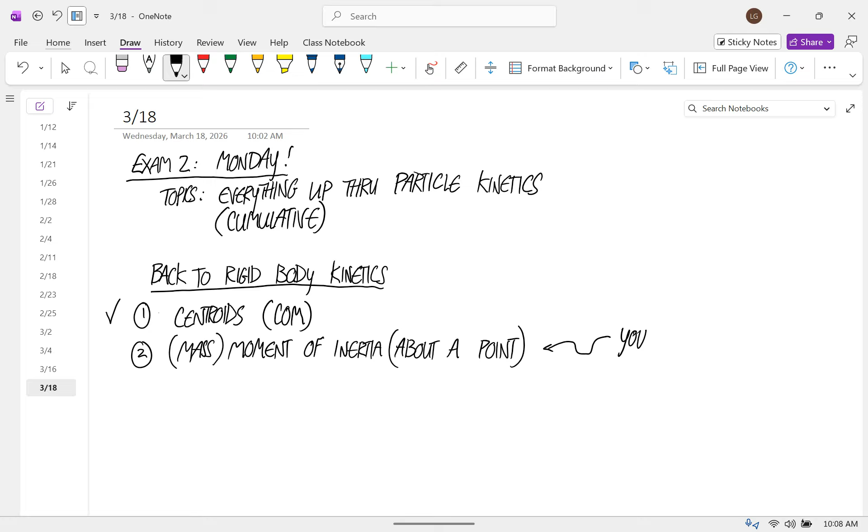And this is what we're talking about right now. You are here. And then after that, we have to talk about the moment of a force about a point. And again, if you're cool, you just call it a moment, but you have to remember that all this stuff matters.

Okay, so we're talking about the mass moment of inertia about a point. Last time I gave you the definitions, formulas I guess. Formulas for the moment of inertia. So now you know I'm trying to be cool. The moment of inertia about the center of mass for 4 simple shapes.

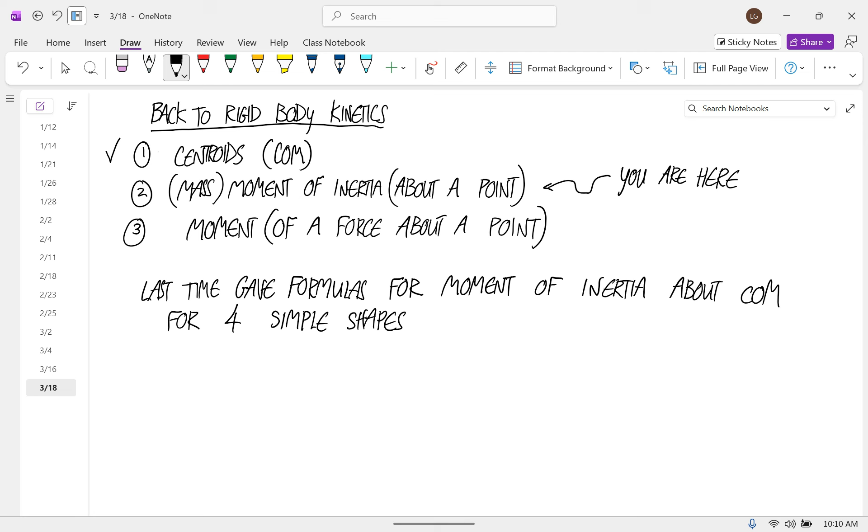Those were a slender rod, a thin rectangular plate, a thin disc, and a sphere. Okay? But those are about the center of mass.

So what if you want the moment of inertia about a point that's not the center of mass?

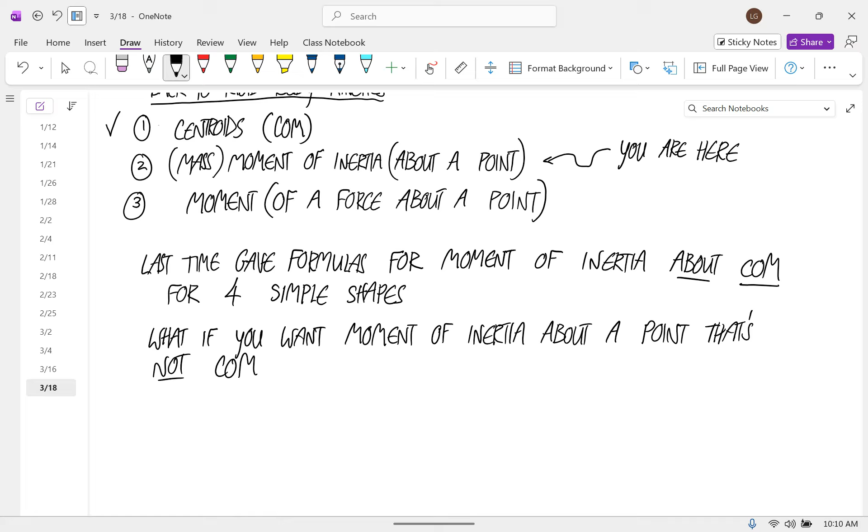And the answer is the parallel axis theorem. How many of you talked about parallel axis theorem in Physics 1? Okay. It's related to that. The parallel axis theorem is a thing.

Well, I'll talk about what it is. I think it's common that it doesn't come up, and you're just given formulas for the moment of inertia about the center of mass. You can give formulas for moments of inertia rotating around different points, and you can kind of gloss over that in Physics 1.

But here is the idea of the parallel axis theorem. If you have some arbitrary body, okay, and say that the center of mass is here, and say that you know the moment of inertia about an axis that goes through the center of mass. So I'm going to call this I sub C, the moment of inertia about an axis through the center of mass.

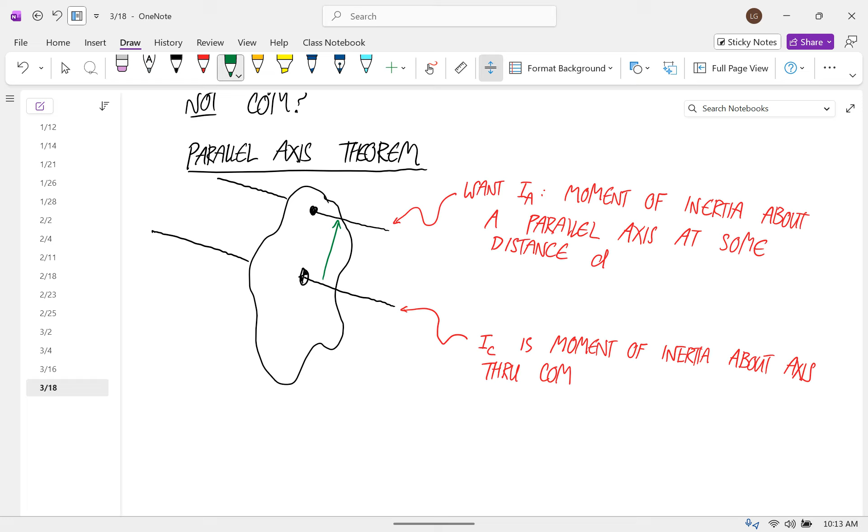And say that what you want is the moment of inertia about an axis that's parallel to that, but at some distance away. So say we want I sub A, which is the moment of inertia about a parallel axis at some distance d. Okay, so the distance between these two lines is d.

Then the moment of inertia sub A is equal to the moment of inertia for the one that goes through the center of mass, plus the mass of the body times the distance squared. The distance between those two axes squared. So that's the parallel axis theorem right there.

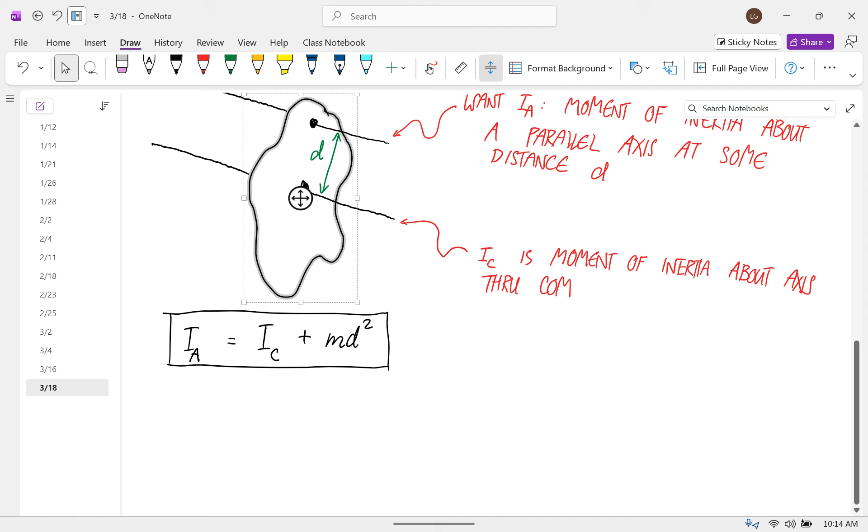And it means that even though all I gave you was the formulas for axes that go through the center of mass, we can easily calculate the moments of inertia for a parallel axis through any other point. What happens when we derivate that? What's the derivative of inertia? I'm just trying to think about the mathematical approach to why this works.

So yeah, why? This comes from an integral definition, and you could go through it. Don't write this down, but the moment of inertia about some point is the integral over the whole mass of r squared dm. So for each infinitesimal little piece of mass, you have to figure out the distance from the axis to that point and square it, then calculate that integral.

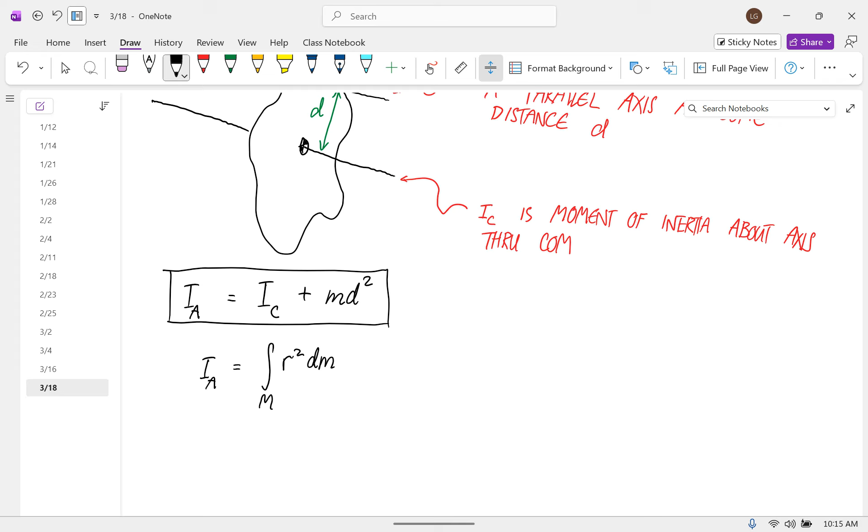And the way it works is, the definition of the center of mass is 1 over the total mass times the integral over the whole mass. I guess, instead of the centroid definition, I'll give the definition for the center of mass. So over the full mass, of x, y, dm. And this can't be area, this has to be total mass.

And then for each one of the little dm's in the definition of the moment of inertia, you can define that as a vector that goes from A to the center of mass to the point you care about. That's just vector addition. And then you can go through this whole derivation and pull out the part of the integral that is the moment of inertia about the center of mass, and you come up with this formula. It's messy, a little bit long, but you can come up with this really clean solution by just using those two integral definitions.

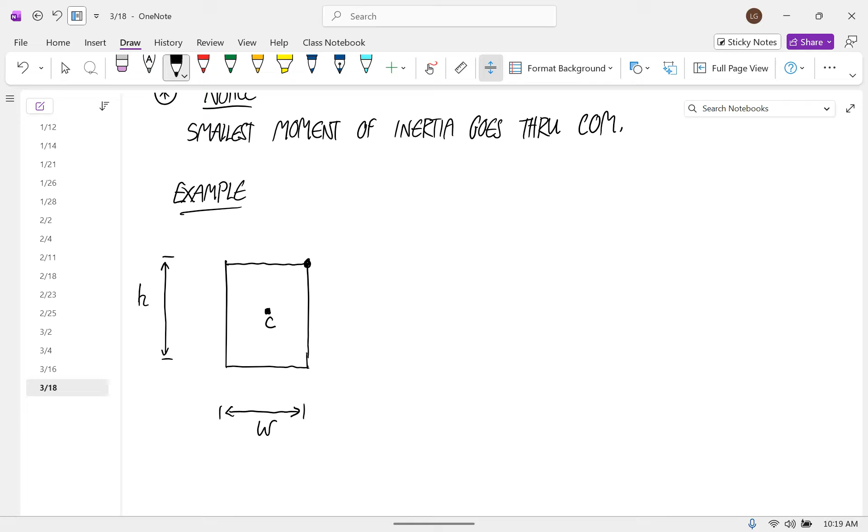And we're doing a planar problem. The center of mass is right where the two axes of symmetry, lines of symmetry, cross. So it's right here. And let's put a point A here. And we want to calculate the moment of inertia about A.

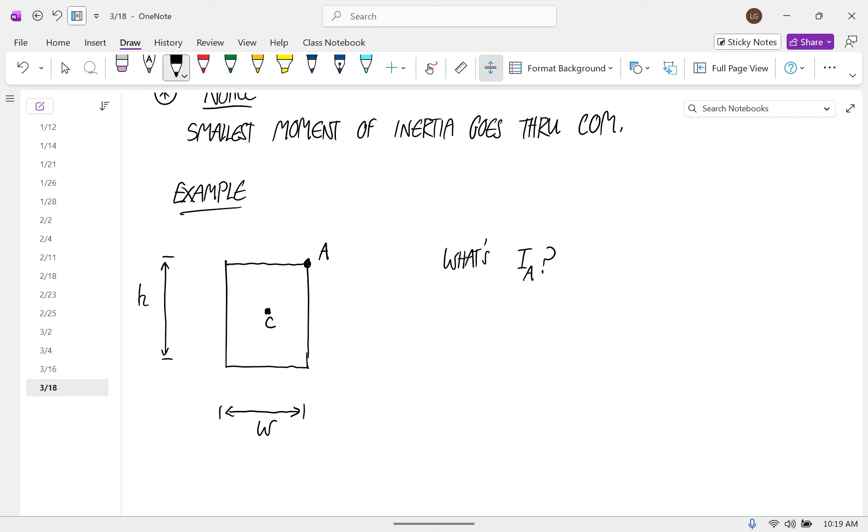Okay, so this is our rectangular plate. We're doing a 2D problem, so think about whether it's rotating like a blade or a paddle. Is this rotating about Z like a blade, or about X or Y like a paddle? I think it's going through like a blade - think of it as sheet metal spinning around in the plane.

The funny thing is, I said thin rectangular plate here before, but for this one it doesn't matter mathematically whether it's thin or not. For the other two axes, it does. So this could actually be like a rectangular cylinder going as far as you want into the page, and this formula is still exact.

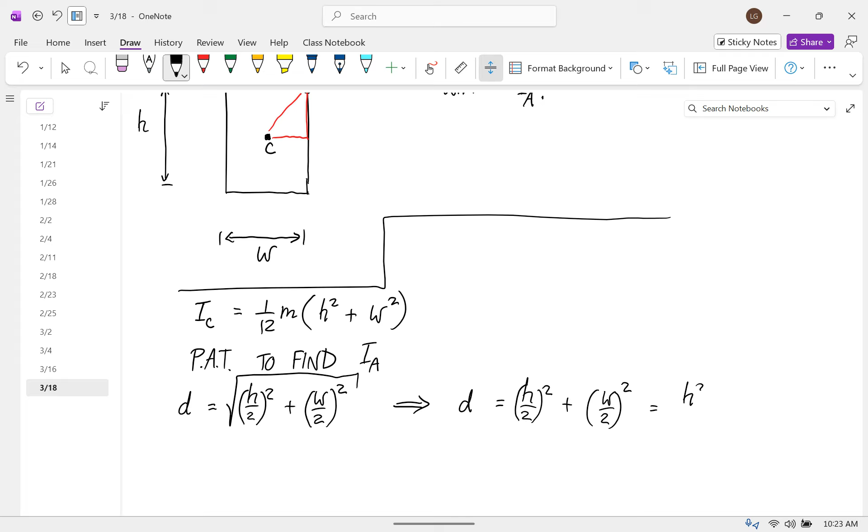So if you square that, d squared is equal to h over 2 squared plus w over 2 squared, and we can write that as h squared over 4 plus w squared over 4.

And so I sub A is equal to 1/12 times mass times the quantity h squared plus w squared, plus 1/4 times the mass times h squared plus w squared.

How did you get rid of the square root for d? Because I wrote this wrong - this is d squared.

Because what we want in the parallel axis theorem is mass times d squared. So now everything's the same except the coefficients. If you get a common denominator, this is 3/12, and 3/12 plus 1/12 is 4/12, so this is 1/3 times the mass times h squared plus w squared.

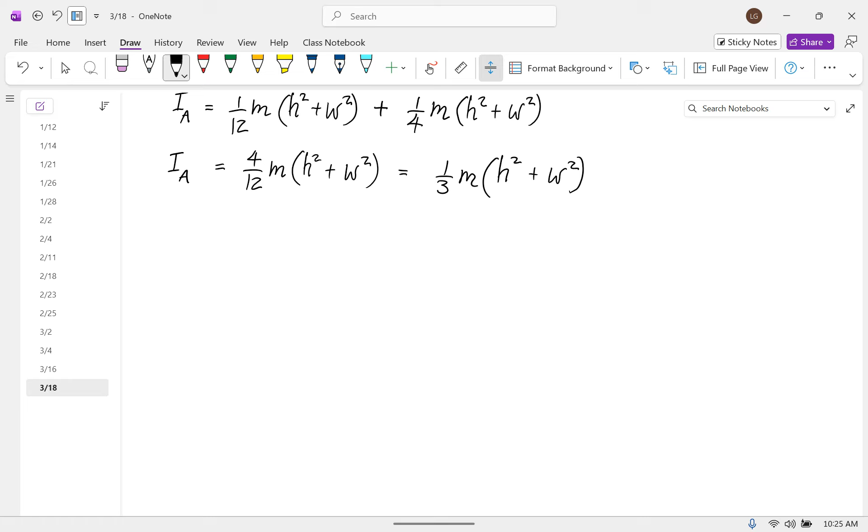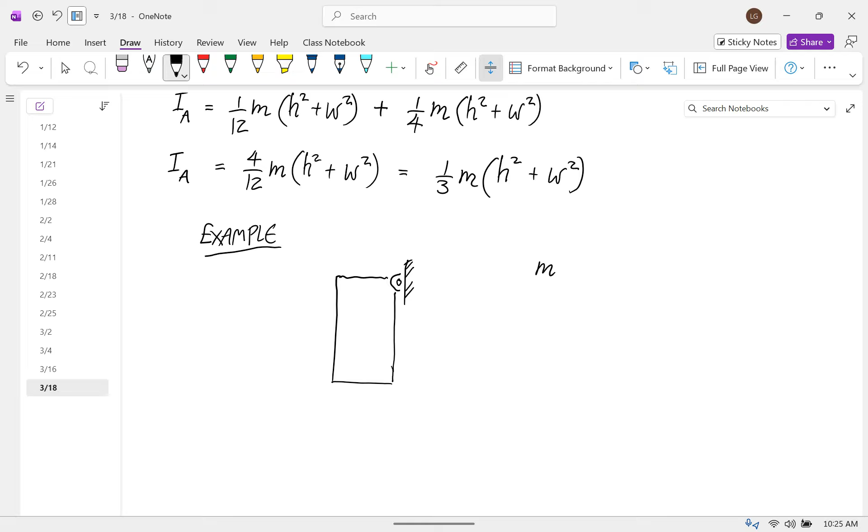Okay, so when would this come up? Let's say we have an object like this, and let's say the mass of this object is 10 kilograms, and this distance is 0.2 meters, and this distance is 0.6 meters.

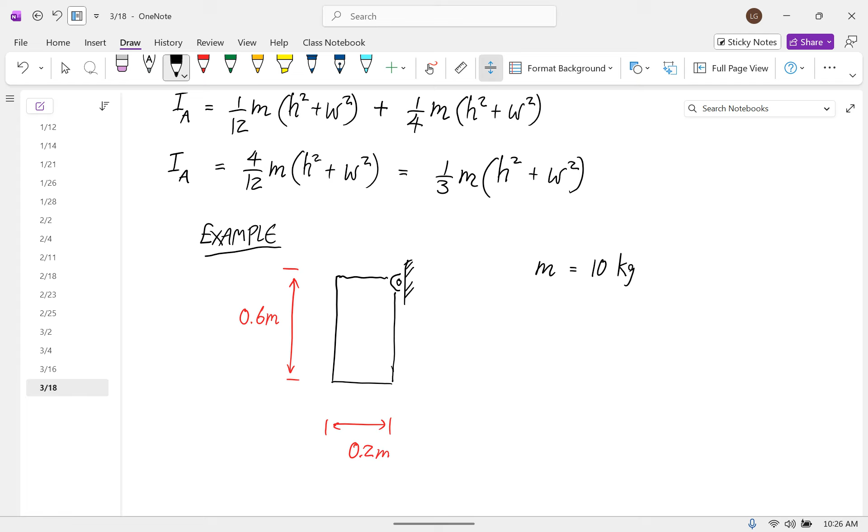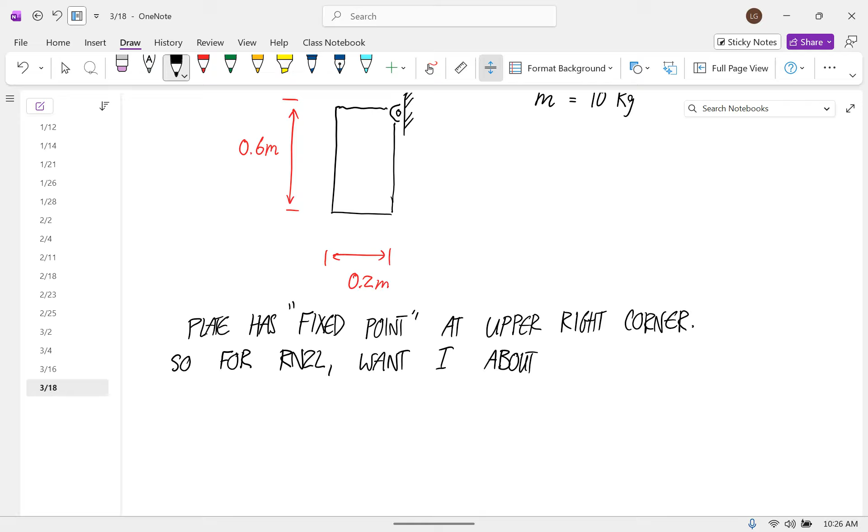This plate has a fixed point at the upper right corner. So to use rotational Newton's second law, we want the moment of inertia about the fixed point, about that upper right corner. I'll call this point A so we can refer to it.

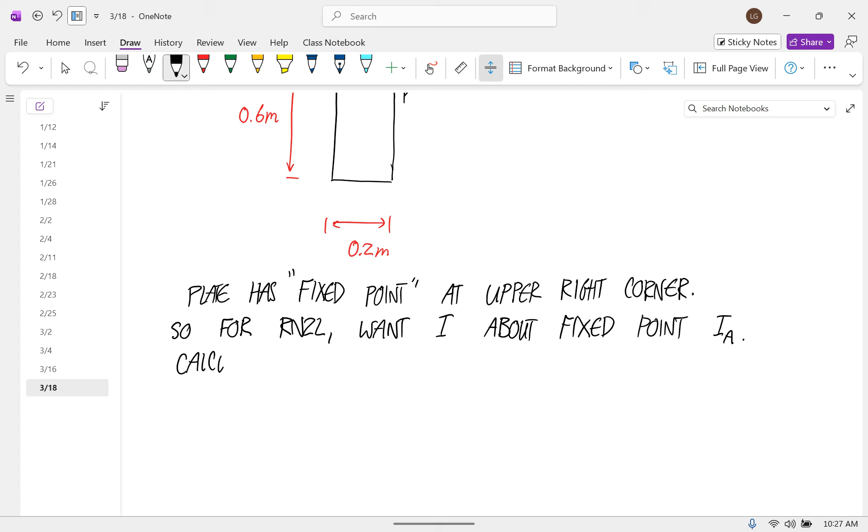Okay, so let's calculate it. I'm going to use the parallel axis theorem again, because in general you're just going to have to use that, even though I just came up with a formula that we could use for this.

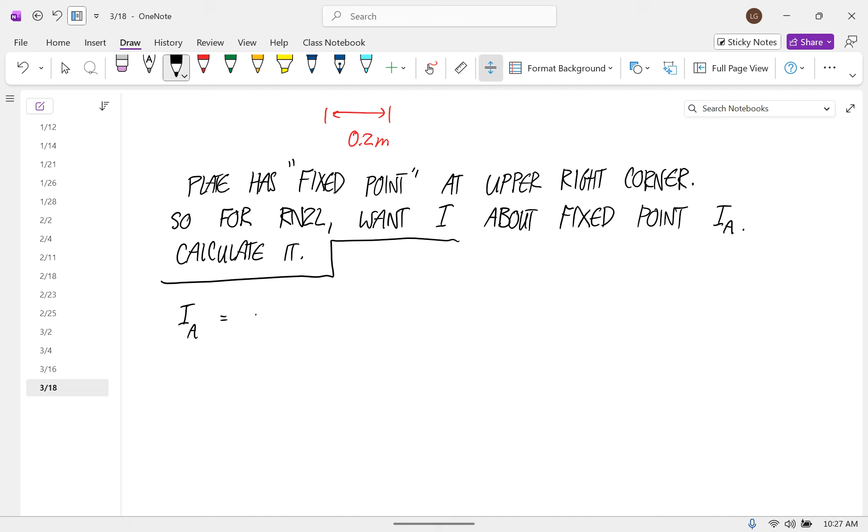So the moment of inertia about A is equal to 1/12 times the mass times the quantity 0.2 squared plus 0.6 squared, plus the parallel axis theorem part, that is the mass times the distance squared: 0.2 over 2 squared plus 0.6 over 2 squared.

I need a calculator.

So this is equal to 0.3 repeating plus 0.1 squared plus 0.3 squared. What's wrong with that? This is just 1.0. And so I sub A is equal to 1.3 repeating, and the units are kilogram meter squared.

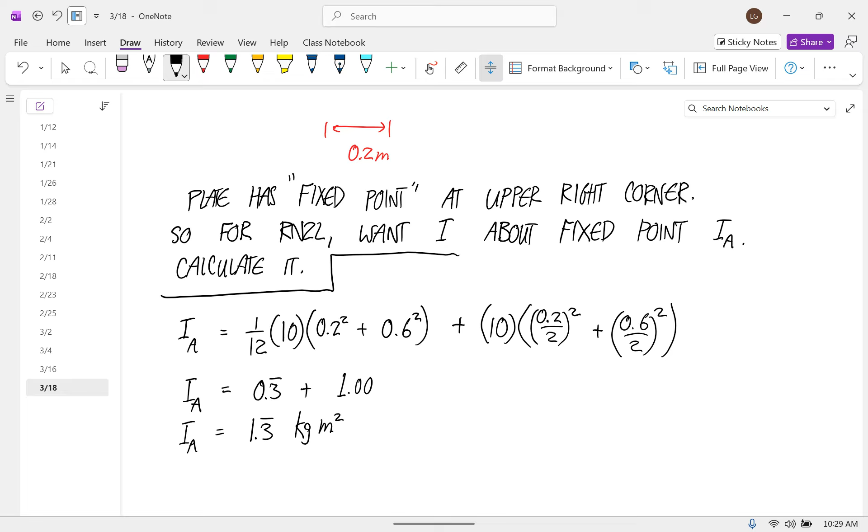Okay, any questions about that? And if your fixed point was somewhere else, then you just use that different distance from the center of mass to do this calculation.

So now, building a complicated shape out of simple shapes.

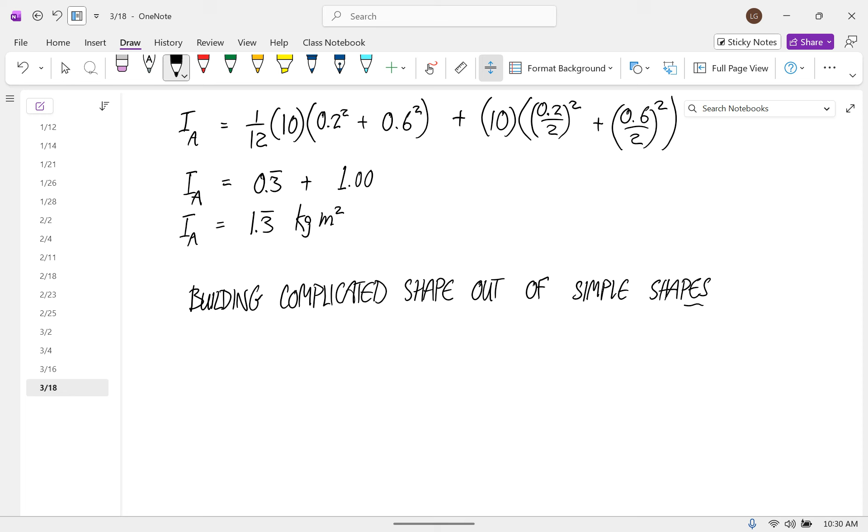Okay, so let's say that we have something like this. And we want to calculate the moment of inertia about some point A. How are we going to do this?

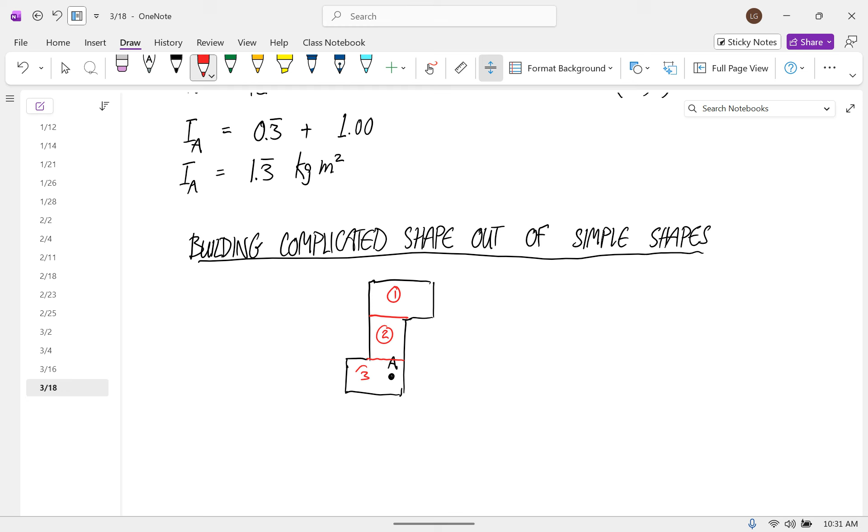Break it up into the simple shapes. So I'll have one rectangle here, and one here.

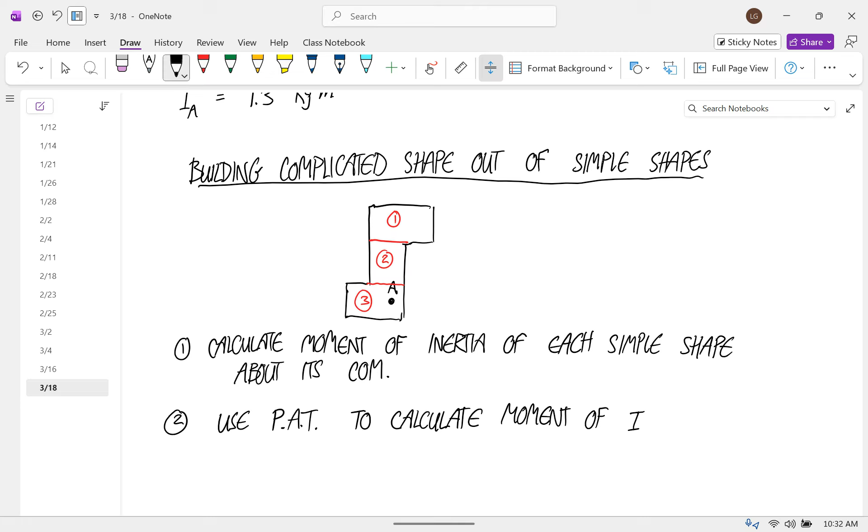So first, calculate the moment of inertia of each simple shape about its center of mass. Second, use the parallel axis theorem to calculate the moment of inertia of each simple shape about A, and then third, just add those up.

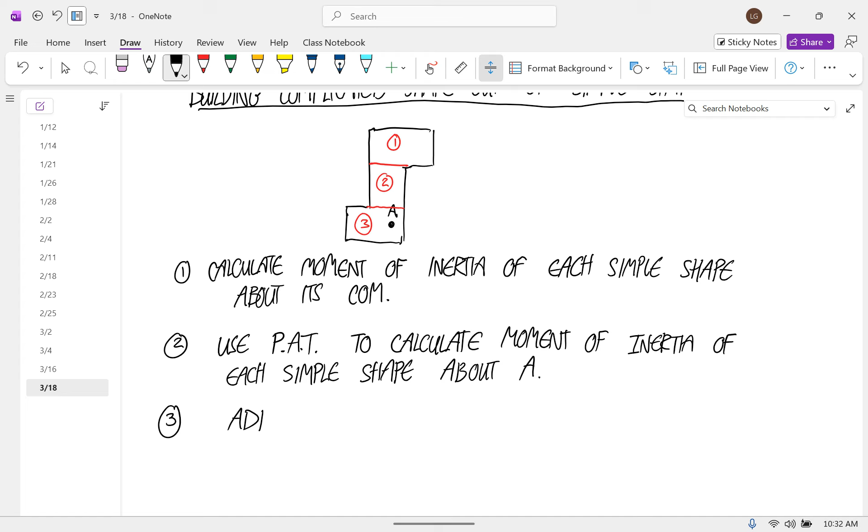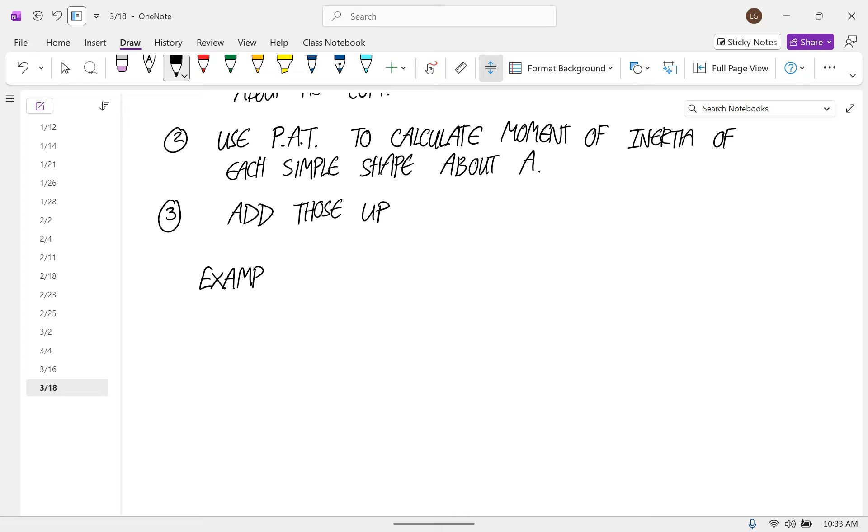Okay, so let me do an example of that. Let's say we have an L shape, and the thickness everywhere is 0.1 meters, and this is 0.1 meters. And this distance is 0.5 meters. And this distance is 1 meter.

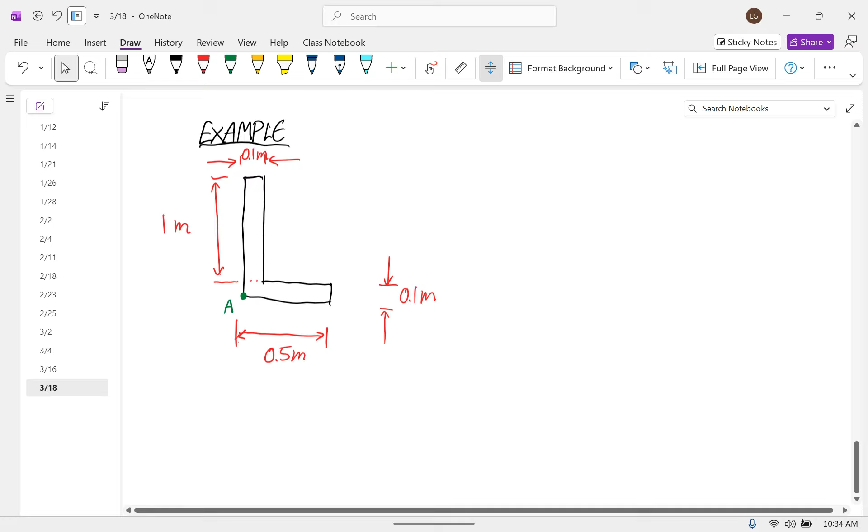And let's calculate the moment of inertia about this point. So step one, we're going to break this up into two rectangles. I'll call this one rectangle 1, this one rectangle 2.

Okay, so for rectangle 1, the moment of inertia about the center of mass is equal to 1/12... Oh, I didn't give this a mass yet. Yeah, it has to be a homogeneous density. It does, and we're going to just always assume that. So the mass is equal to 5 kilograms.

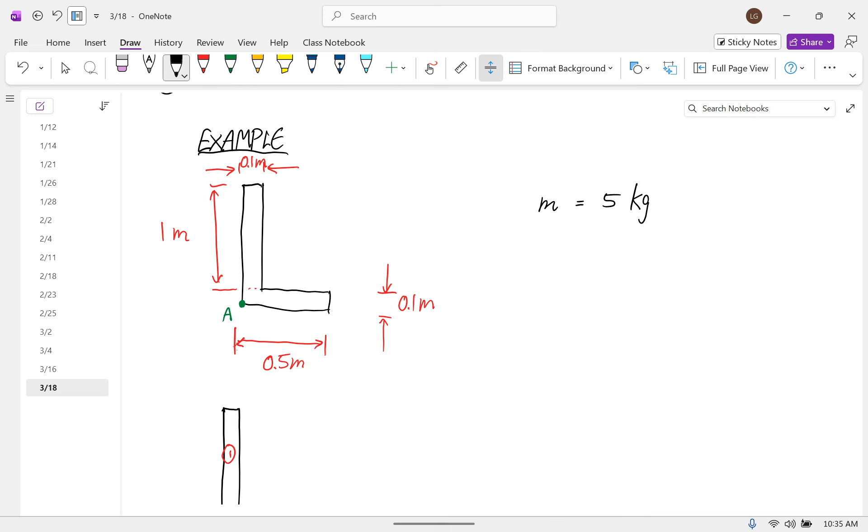Because it's homogeneous, we can just break up the mass for the two bodies by the ratio of the areas. So this is equal to the mass of object 1, which we'll have to calculate, times the height squared, so 1 squared plus 0.1 squared.

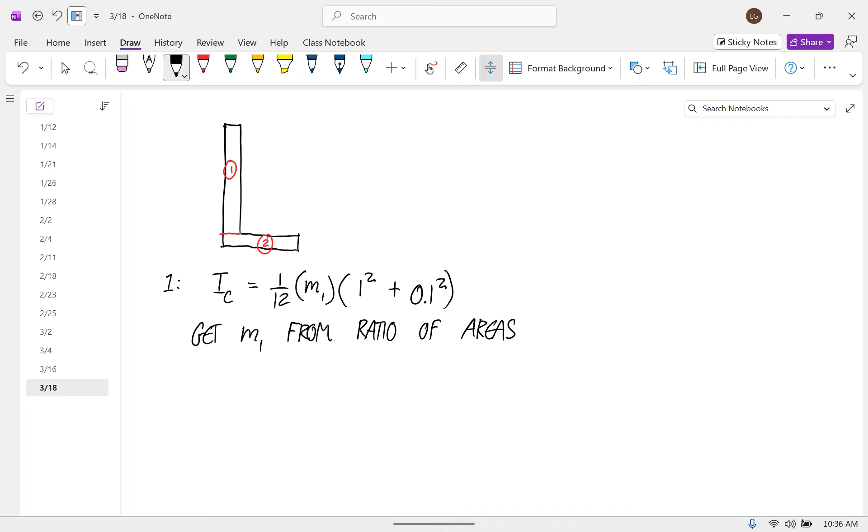The total mass is 5 kilograms, so we're going to get M1 from the ratio of the areas. The area of the first one is equal to 1 times 0.1, so 0.1 meters squared. The area of the second one is 0.5 times 0.1, so 0.05 meters squared. So the total area is 0.15.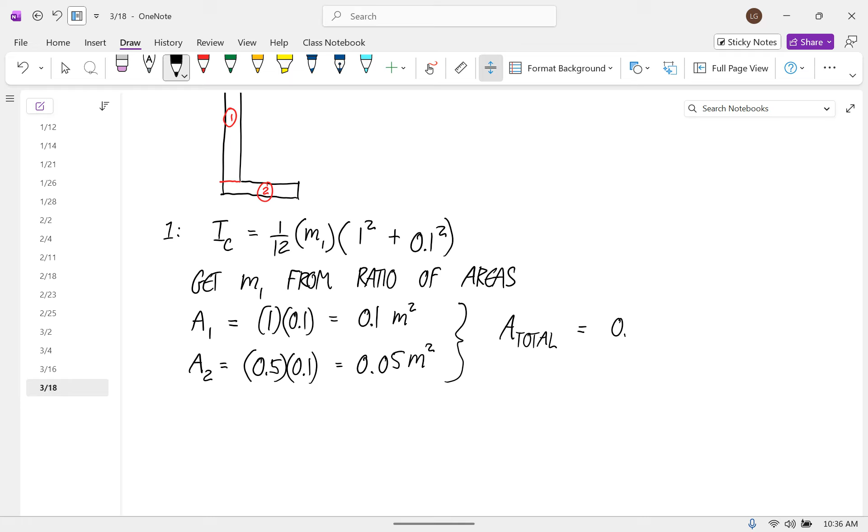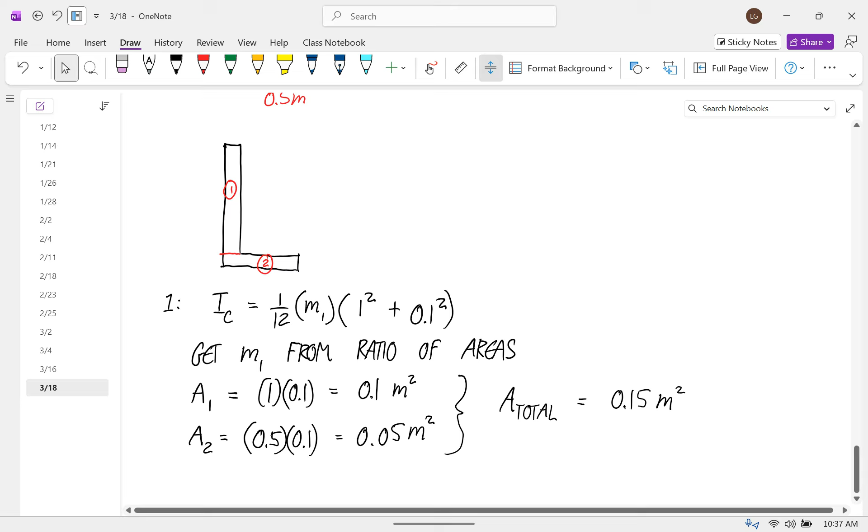That's not right, dang it. You gotta subtract area off that bottom left. So I did like 0.4, right? I did give the distances to make that easier, but I forgot as I was doing this that I was going to have to do this ratio of the areas. Was there another question, or same thing?

Okay, so now we've got the total area. So now we can say M1 over the total mass of 5 is equal to area 1 over the total area. And so M1 is equal to 3.3 repeating. I might as well do M2 here also: M2 over 5 is equal to 0.05 over 0.15, so M2 is equal to 1.6 repeating.

Everyone with me on this? You will have to actually do this on a few problems. Sorry, I kind of muddled the process for this, but anyways, now we have the masses for each of those two rectangles, and now we can go back to calculating the moment of inertia.

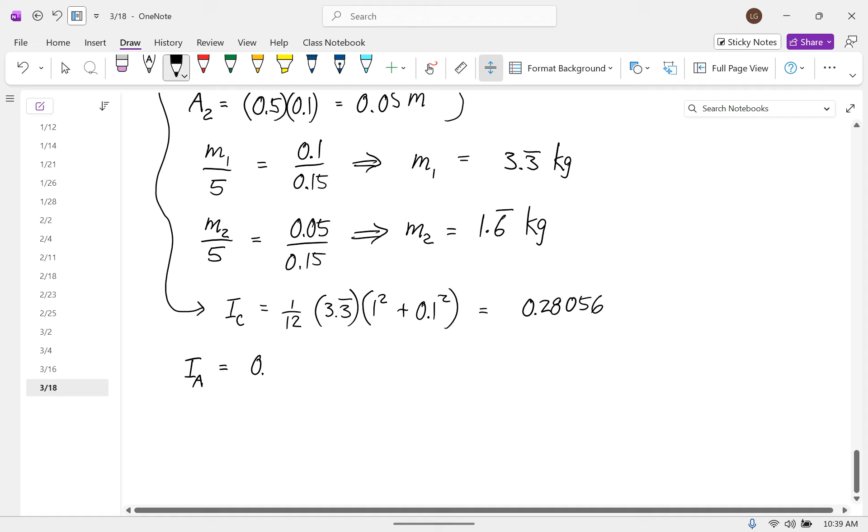And now we'll go: the moment of inertia about A for object 1 is 0.28056 plus the mass of object 1 times the distance from the center of mass of object 1 to our point A, down in the corner. As a vertical distance, it's going to be 0.5 plus 0.1, so 0.6 squared. As a horizontal distance, it's going to be 0.05 squared, just half of the width.

And we get 1.4889 kilogram meter squared. So notice that in the total moment of inertia of that first simple rectangle, the contribution of the parallel axis theorem is much bigger than the contribution of the moment of inertia about its own center. Okay, and now we'll go to object 2, rectangle 2.

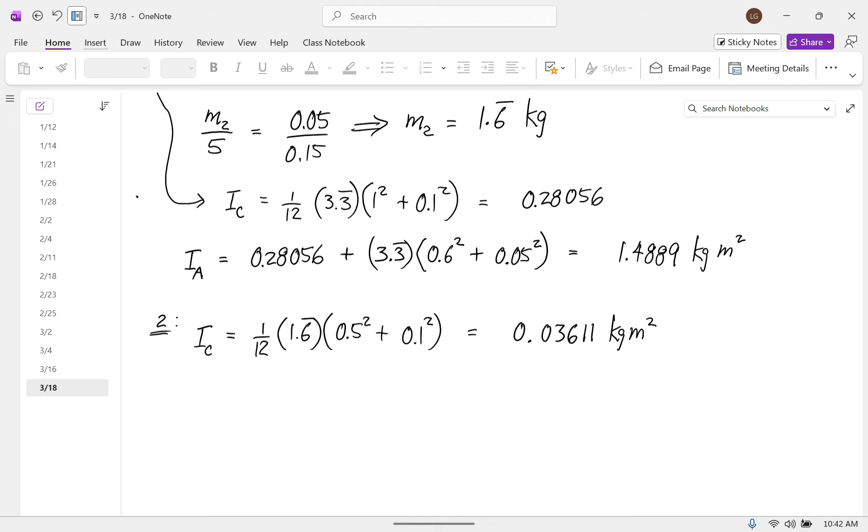And now the moment of inertia of the second rectangle about point A is 0.03611 plus the mass of the second rectangle times the distance from its center of mass to that corner, which is 0.25 squared plus 0.05 squared. And that is 0.11134 kilogram meter squared.

Now add those two together. And the total moment of inertia about A is 1.4889 plus 0.11134, which is about 1.60 kilogram meter squared. Any questions about that?

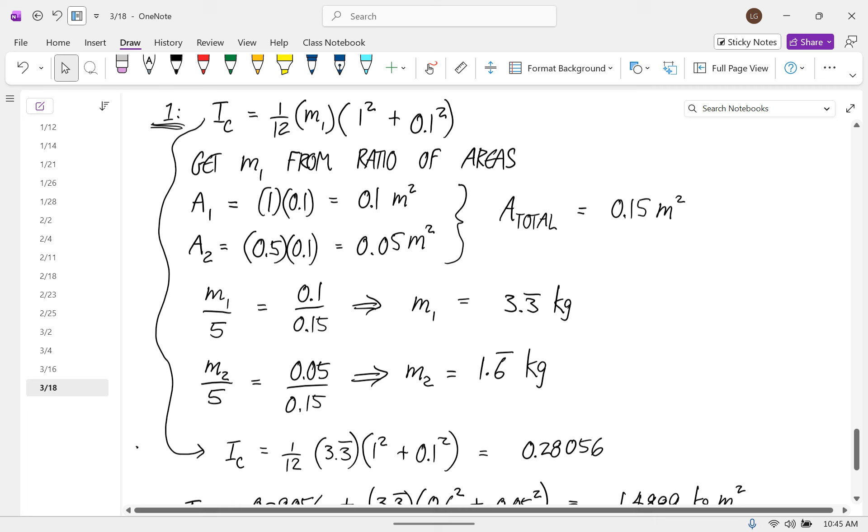So in that equation, if we go down like that, a little bit up—so in parentheses, like 0.6 squared plus 0.05 squared, is that the base and height of that triangle? Exactly, yep. I said this looked negative, but he just put that in there.

Oh yeah, since you're squaring it, you can do it as vectors and have negatives in there and they'll disappear. But if you just look at this green right triangle, the vertical leg is 0.5 to get to the bottom of the vertical rectangle, and then another 0.1 to get down to the corner. So that's where that 0.6 comes from, and the thickness of this is 0.1, so that horizontal leg is 0.05.

So in those IC equations, in that parentheses, the 1 squared plus 0.1 squared, is that the base and height of the rectangle itself? Yeah, that is the height and width of the rectangle itself, and that comes from the formula 1/12 m times L squared plus H squared.

Any other questions about that right now?

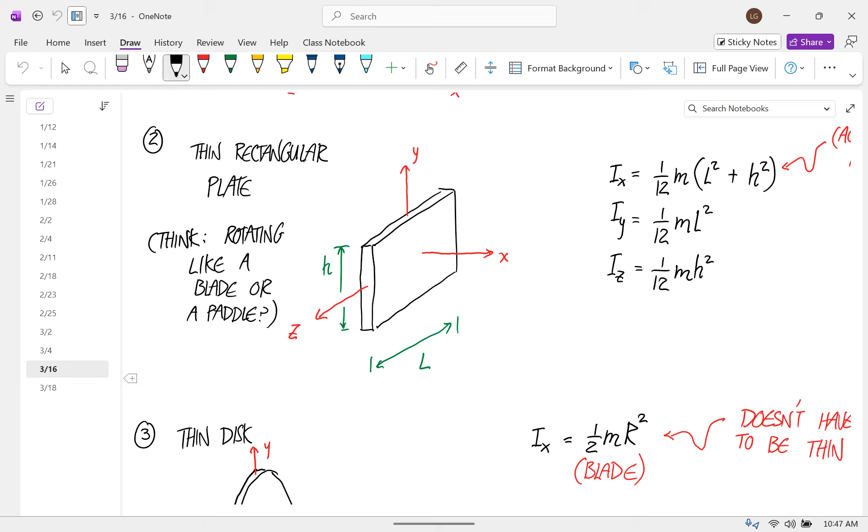So in problems that are trying to make it a little simpler for you, they would actually tell you what the masses are of these individual small rectangles, and then you wouldn't have to do that ratio thing.

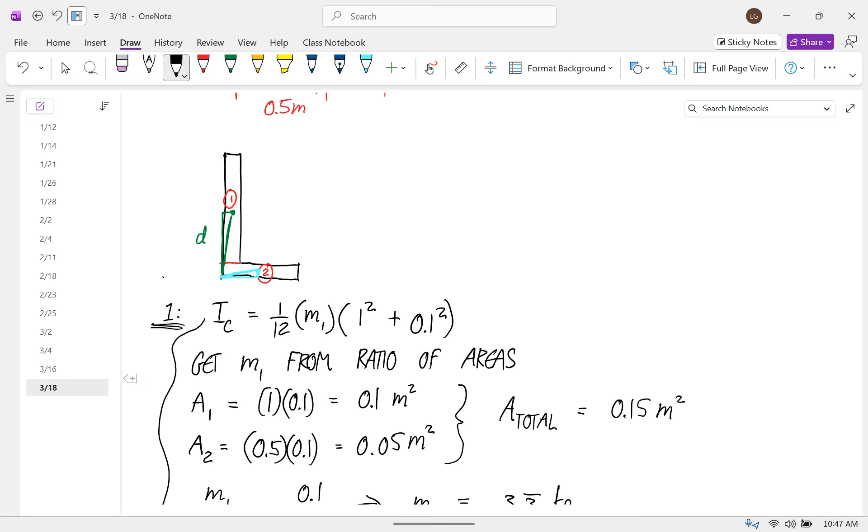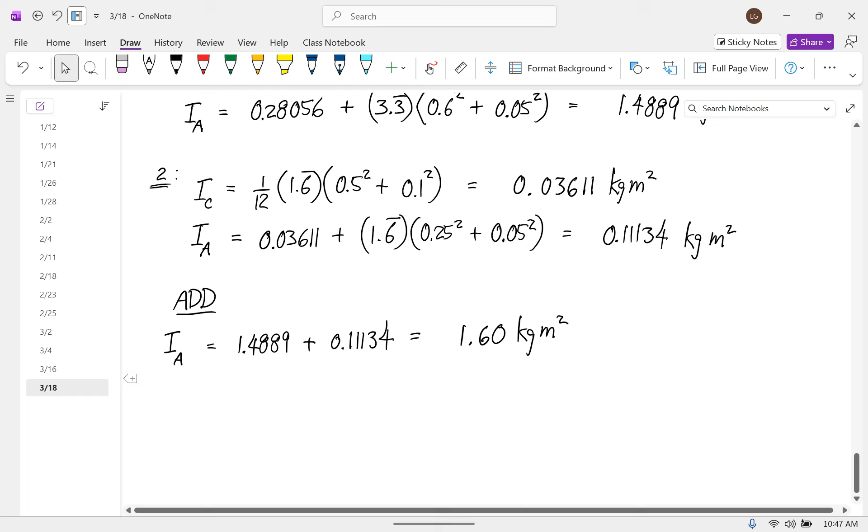Okay, so remember, all of this is getting towards using the equations of motion for rigid body kinetics, which are Newton's second law and rotational Newton's second law. Before getting to that, we had to do center of mass—we had to define that, and we did. And we have to define the moment of inertia about an axis, and we did.

And now we have to define the moment of a force about a point. We'll just call these moments, but remember that the force matters and the about-point matters. And I should say, physicists call these torques.

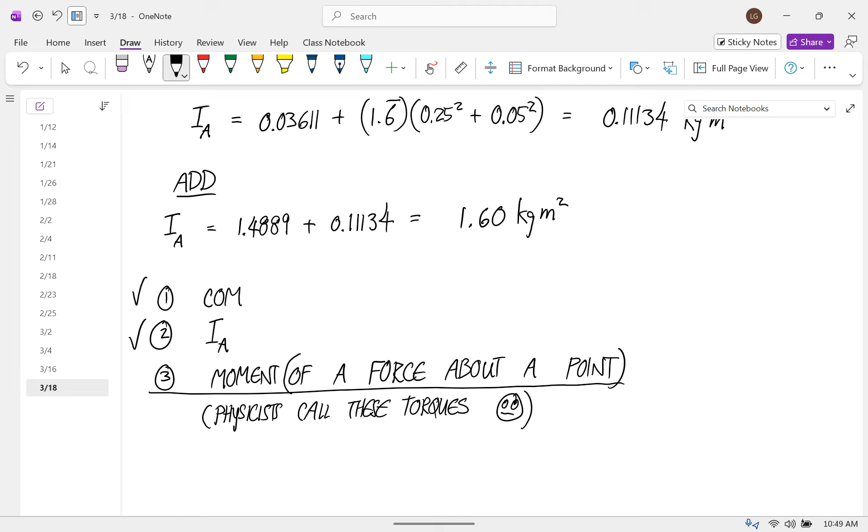Did you say these are requirements for rotational Newton's second law? Yeah, rotational Newton's second law is the moment equation, or the torque equals I alpha equation from physics 1.

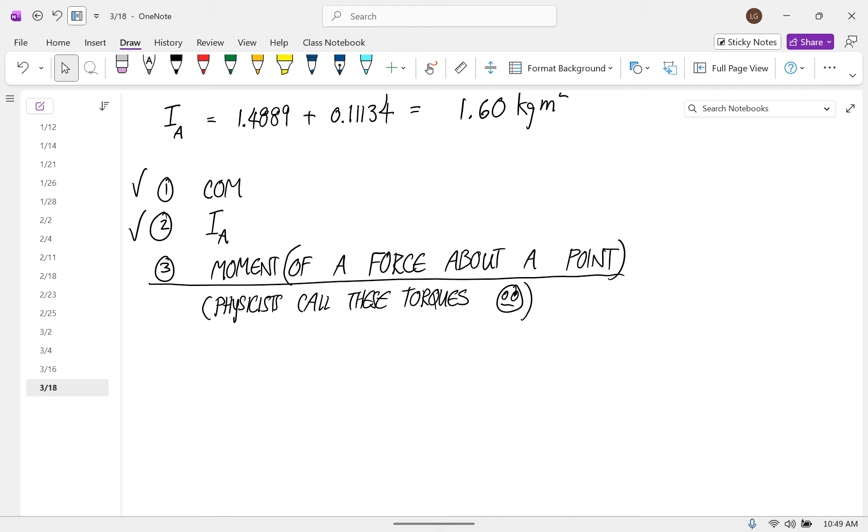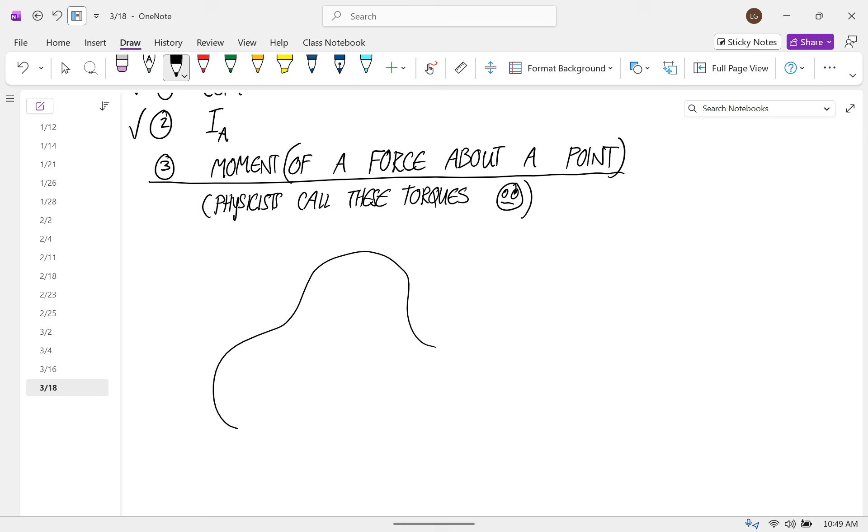Okay, so here's the definition of a moment of a force about a point. So there's the body, and let's say that at some point, I'll call this P. There's a force vector applied to this body. And we want to calculate the moment about some given point A.

So what's the moment MA produced by the force F about the point A? That's what we want to calculate.

So the first thing we're going to do is define a new vector, and that vector goes from A to P. So that red thing is this new vector we're going to define, and we're going to call it rho, the Greek letter rho. You can always calculate it as the coordinates of P minus the coordinates of A.

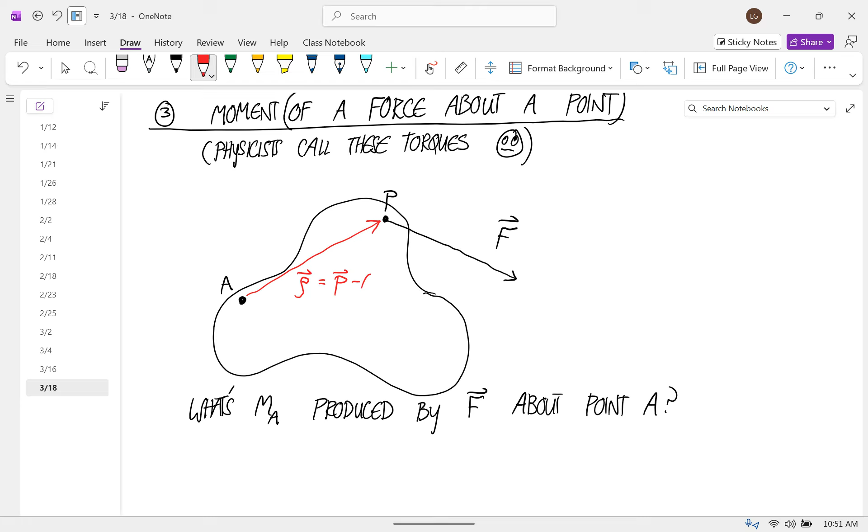And then with that definition, the moment of the force—I'm going to write this as a vector, a moment is a vector. We'll see, to us it sort of looks like a scalar, but it is a vector—is equal to that rho vector that we just defined crossed with the force vector.

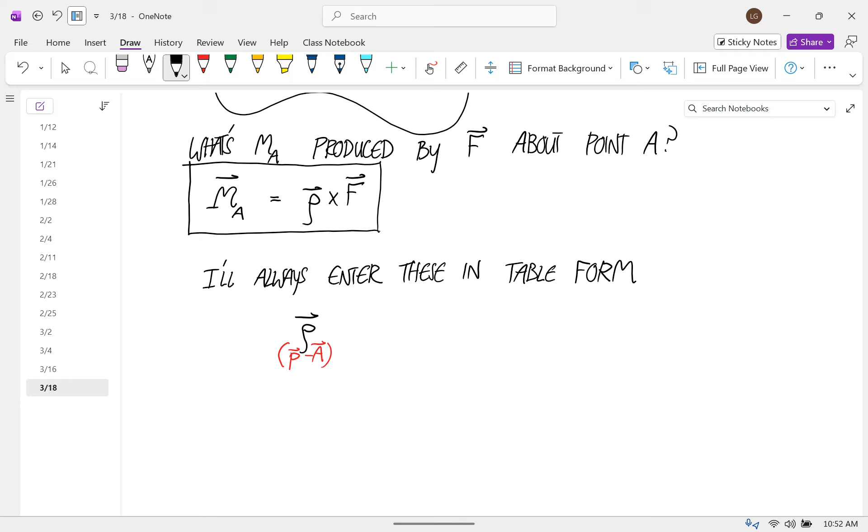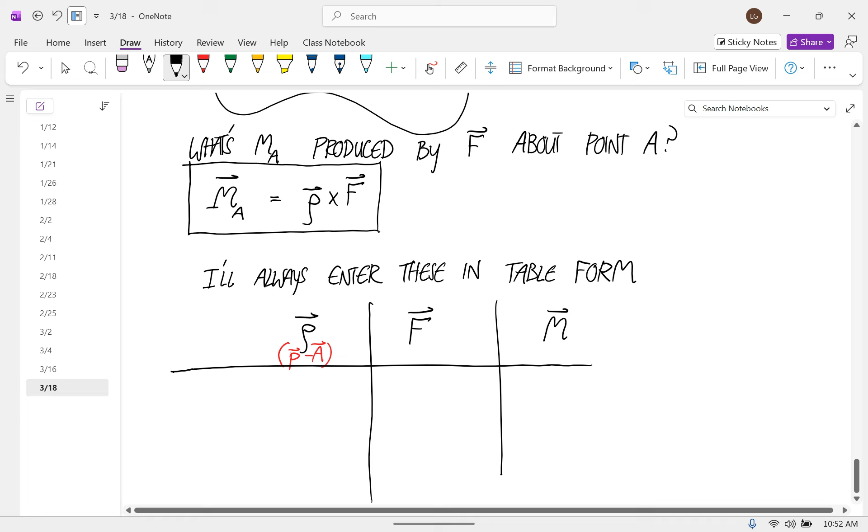And when I do these with a rigid body, I'll always enter these in a table form. This is the same table that you saw in statics, for the people who took statics from me. So my table will always have a column for rho, and you can always calculate this as P minus A. It'll have a column for the force vector and then a column for the moment. Each row of this table will represent one load acting on the body.

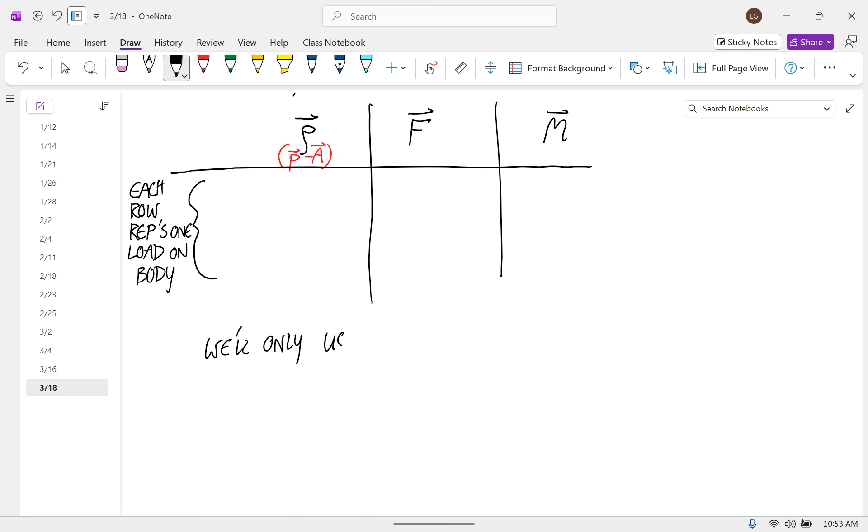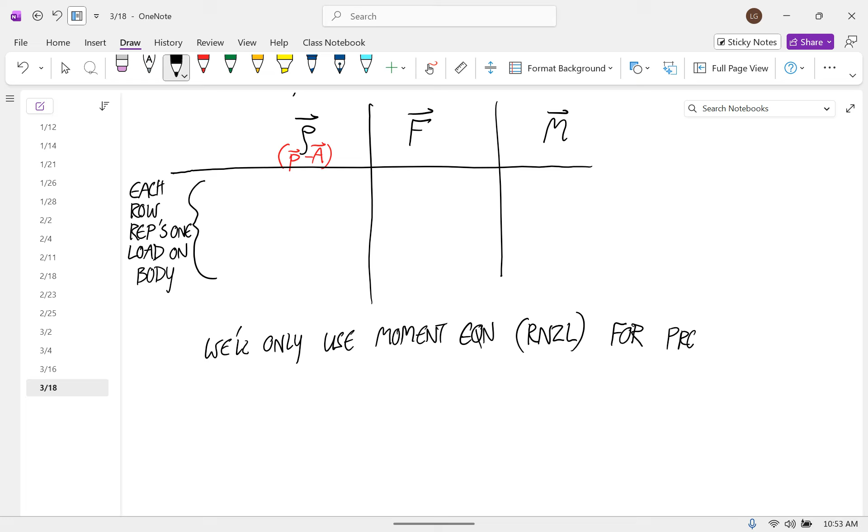We're only going to do these calculations for problems in the XY plane. So we're only going to use the moment equation, which I'm always going to call rotational Newton's second law, for problems in the XY plane.

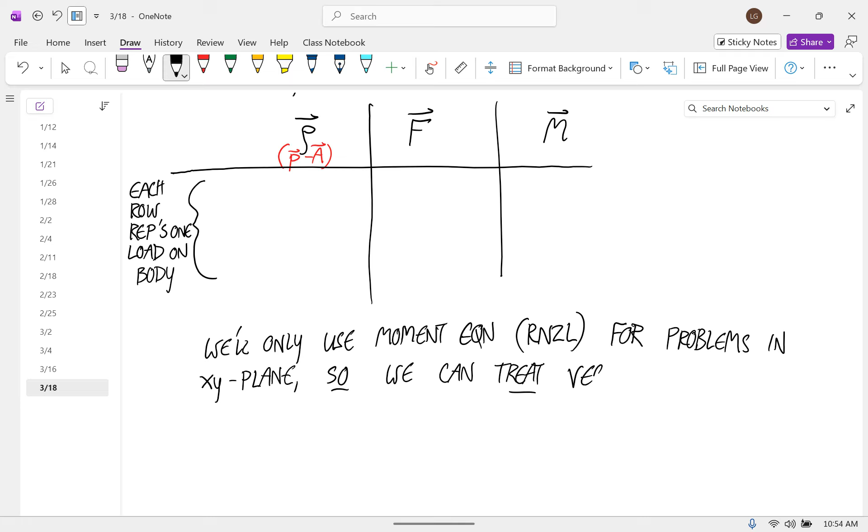So we can treat the vector moment as a scalar, as a single number. But remember that it always is a z component, because we're always going to be taking the cross product of two things in the xy plane.

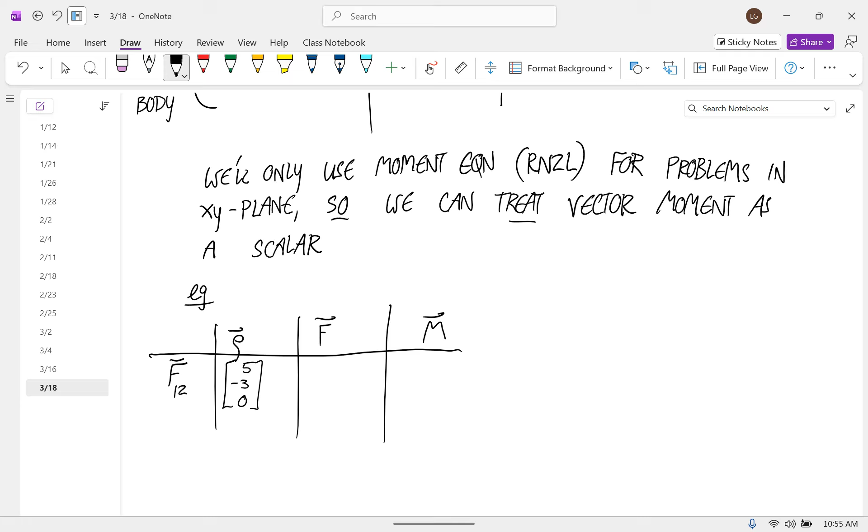Okay, so let me show you, for example, if we have a table entry—row, force, moment—and the force we're dealing with, let's say it's this force F12, and let's say the rho vector is 5, -3, 0, and the force vector is 400, -800, 0. If you take that cross product, you get 0, 0, -2800.

Well, you can just think of that as—let me write it in a simplified form where we have rho, force, moment. Our rho vector we could think of as just 5, -3. Our force vector we could think of as just 400, -800. Our cross product is this times this minus this times this, and you get -2800. Okay.

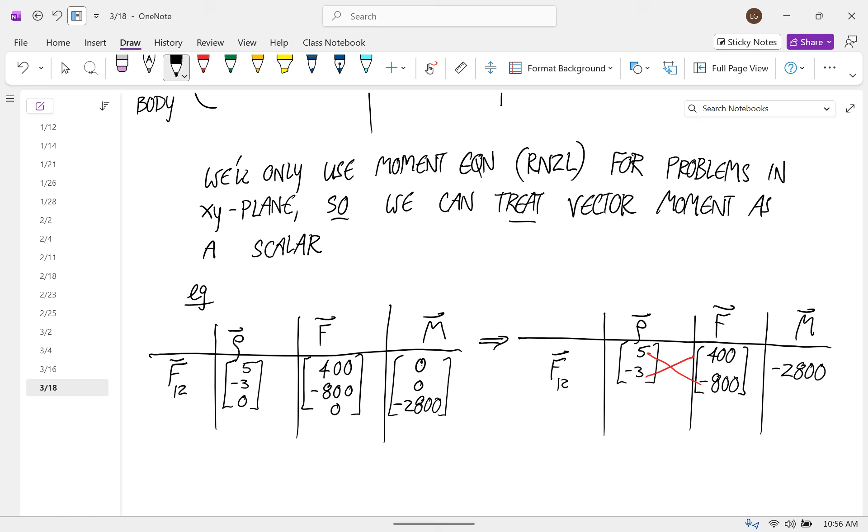Just remember that that's really a z component of a vector. So that's really a z component of a vector.

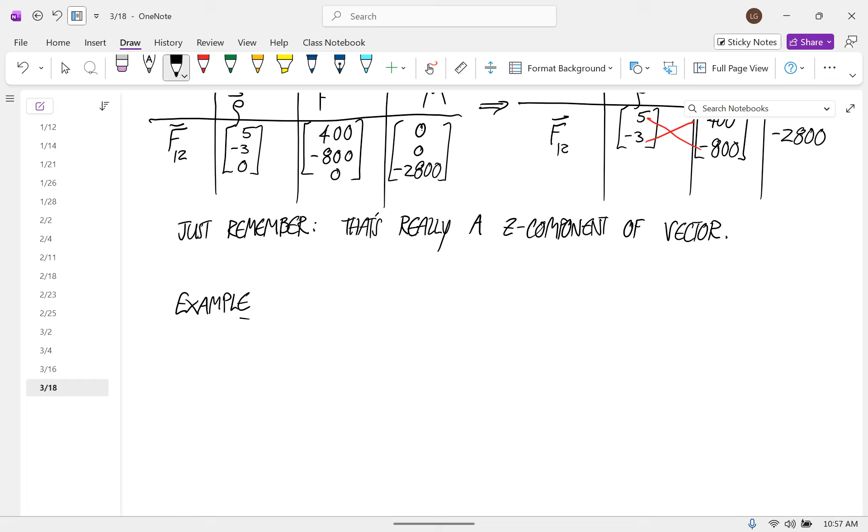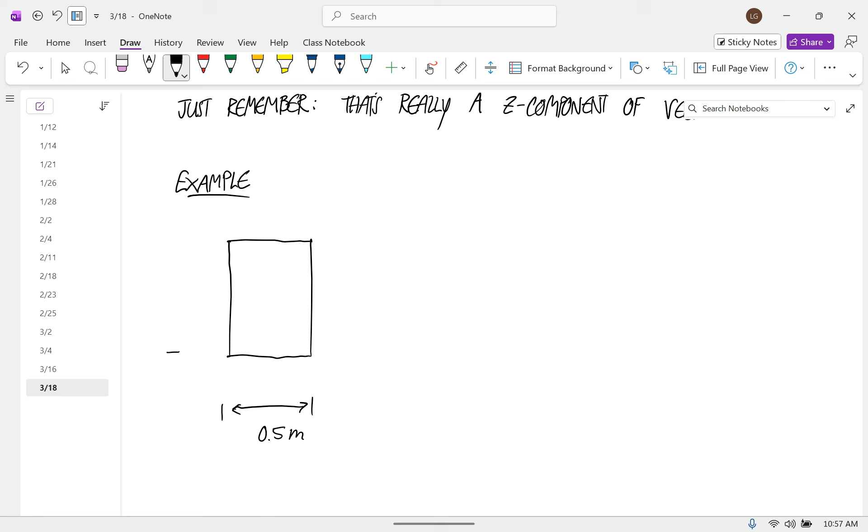Let me do an example. So let's say that we have a body like this, and let's say that this length is 0.5 meters and this length is 0.8 meters.

And let's say we have a force vector at the center acting down. Let's say that this is 50 newtons. And let's say we have an unknown force vector, I'll just call it R, acting here.

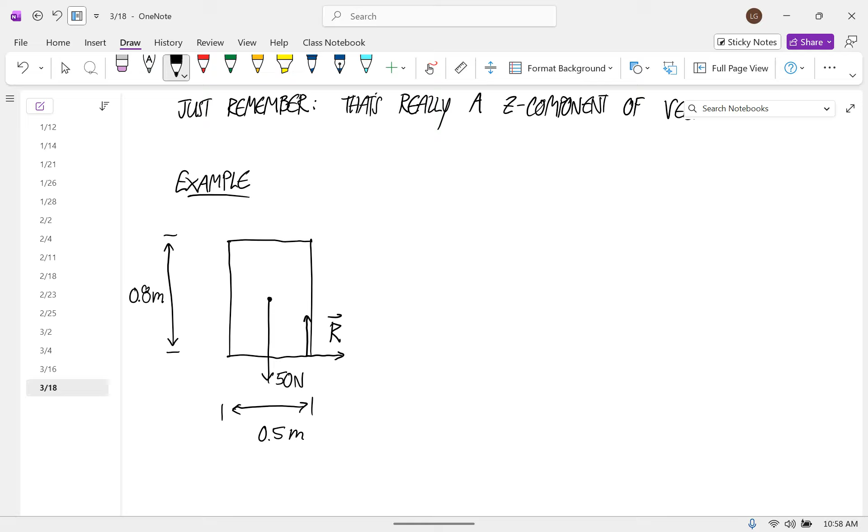Let's say that we want to calculate the moment about this point A. So what's the total moment about A? I'm going to write out my table. So I have rho vector, force vector, and the moment.

I'm just going to go through these forces one by one. First, I'll do the 50 Newton force. The rho vector is the vector that goes from where the force is applied, from your about point to where the force is applied. It's the point where the force is applied minus the coordinates of A. So this rho vector is this.

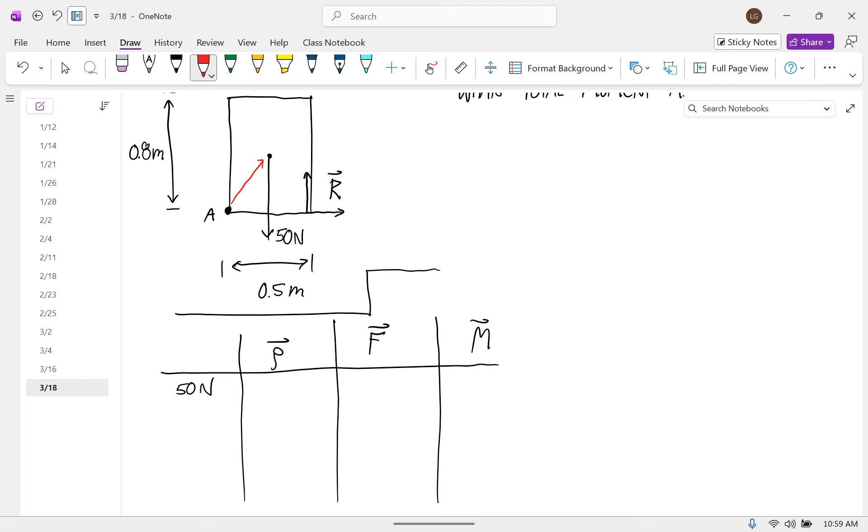So the x component of that red vector I just erased is 0.25. The y component of that vector is 0.4. Everyone with me on that rho vector? The force vector is 0, negative 50.

The cross product is this times this minus this times this. So we get negative 12.5.

And now we'll do it for the r vector. So the vector from the about point to where that r vector is applied. So the vector we want is this. So the components of that vector are 0.5, 0. The force vector is some unknown rx and some unknown ry.

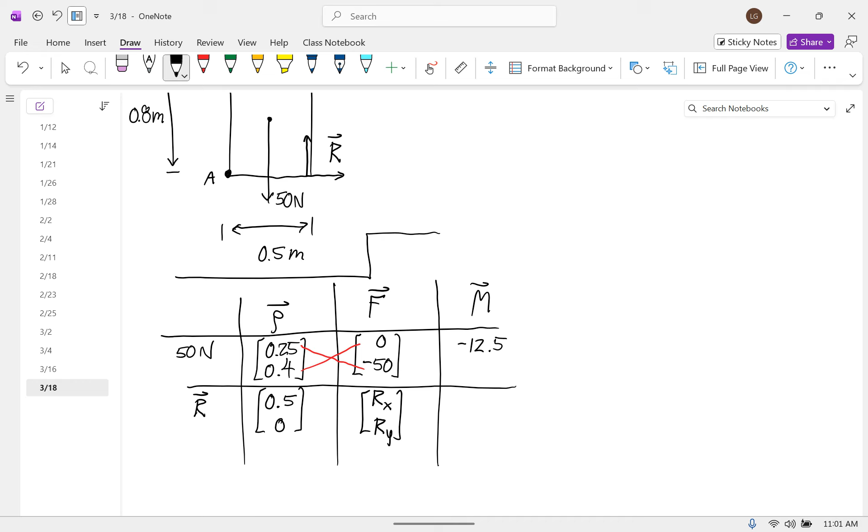The cross product is this times this minus this times this, and so that is 0.5 ry.

And so the total moment about A is negative 12.5 plus 0.5 ry in the z direction. Or you could write it as 0, 0, negative 12.5 plus 0.5 ry.

Any questions about that? Okay, so you can see from the way moments are calculated, they change if the force changes, and they change if the about point changes, right? Both of those come into the calculation, so changing either one of them would change your answer.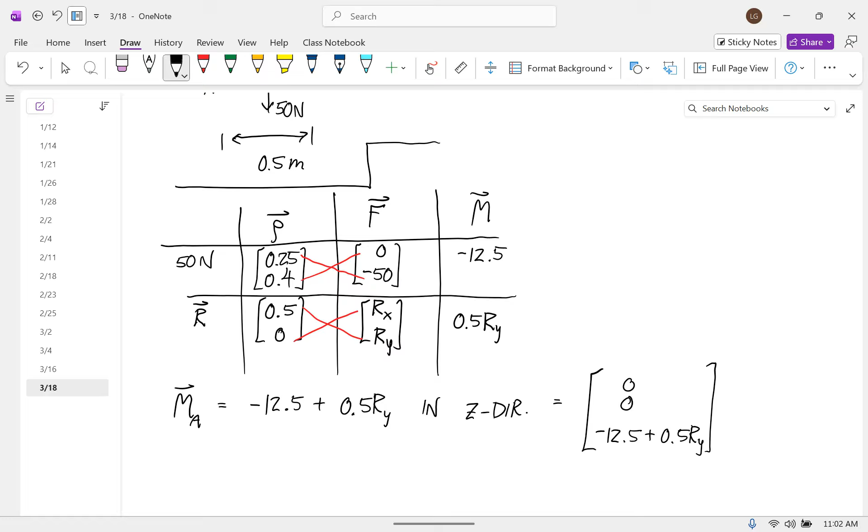There's one case where a moment does not change based on the about point. So one weird type of moment that doesn't depend on the about point. Anyone know what I'm going to talk about here? Couple, exactly.

Okay, so a couple is an equal and opposite pair of forces acting at a distance.

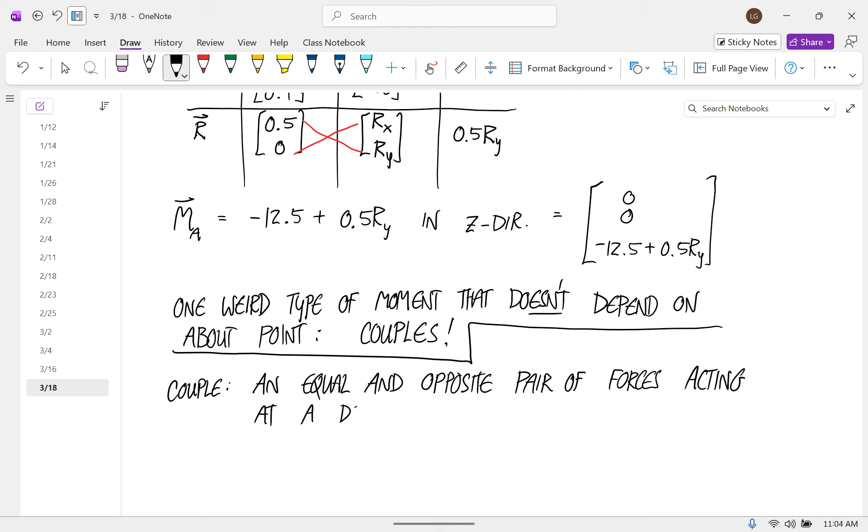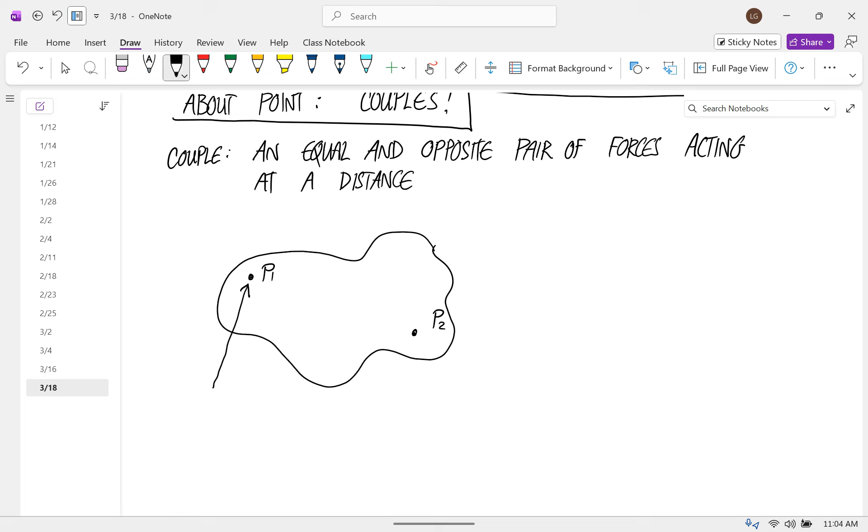Okay, so let me show you an example of this. So I could call this P1 and this P2. And at P1, let's call this the force vector F acting there. And then at P2, we have to have an equal and opposite force, so it has to be parallel but going the other way. So this is negative F.

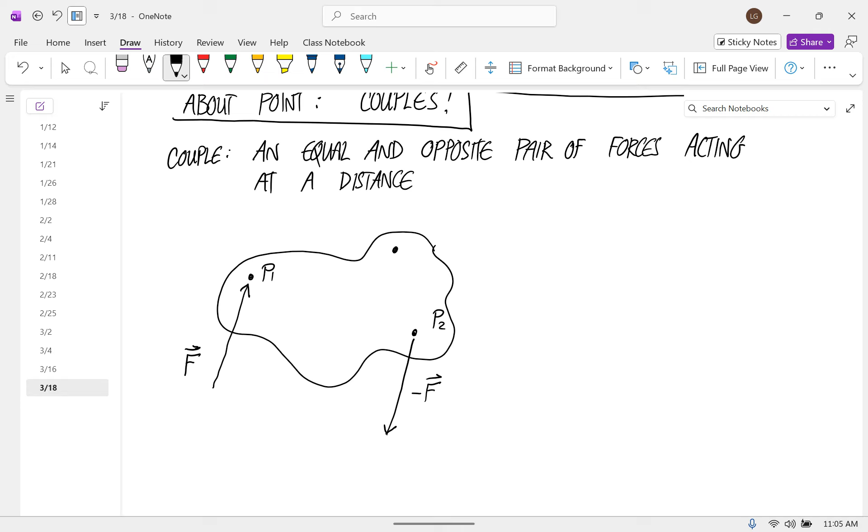Okay, and let's calculate the moment about some point A. So what's the total moment about A for this couple?

So what I'm going to do is I'm just going to calculate the moment produced by F, the moment produced by negative F. Both of those are going to have A in them because moments depend on A. But then I'm going to multiply out everything I have, do cancellations, and what we're going to see is A disappears from the equation. And the meaning of that is no matter what A I chose, the moment produced by this couple would be the same. So the total moment for this couple, we have our rho vector for F.

So let me start out by saying, okay, we have rho 1 crossed with F plus rho 2 crossed with negative F. And now I'll substitute in the meaning of this rho vector. So we have P1 minus A all crossed with F plus P2 minus A all crossed with negative F.

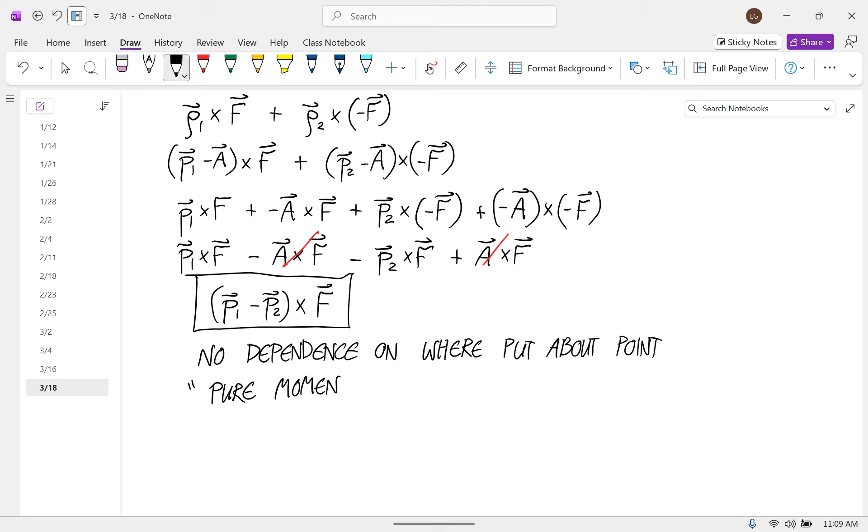So in that sense, we're going to just think of this as a pure moment. And in the table, you'll put this in like this.

If you have a couple that we'll call M, and you have your table with your rho column, your F column, and your moment column - we don't care about the rho vector because that's only there to get A into the equation. We don't care about the F column because these are equal and opposite forces that cancel each other out.

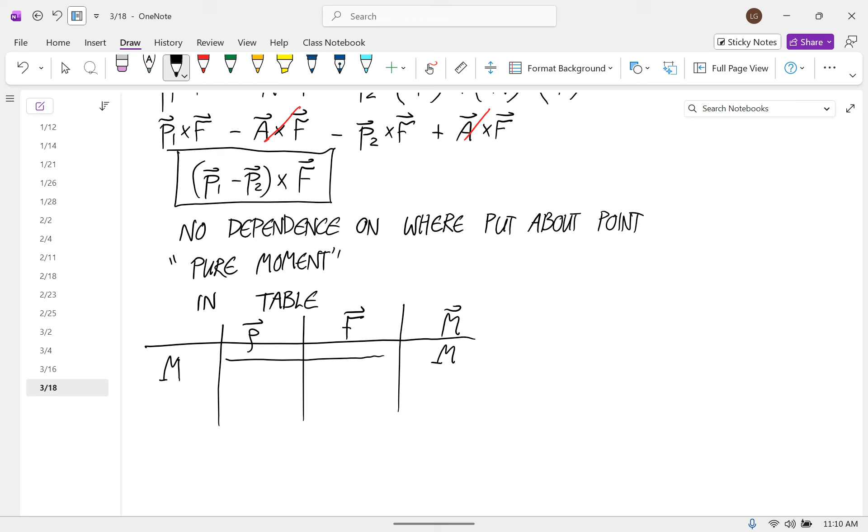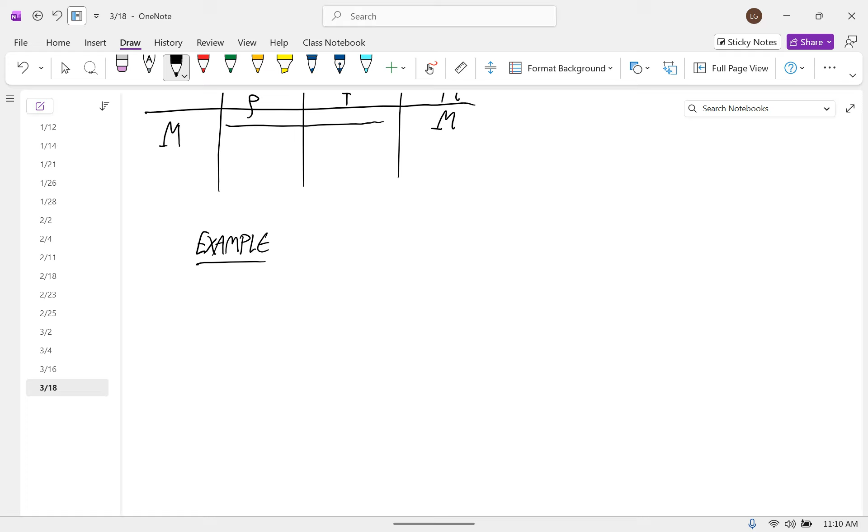So you can forget about all this and just put it in as M or whatever the value is. Okay, let me do one more example. So let's say we have a beam like this with 100 Newton force down from the center.

And let's say at this corner, we have an unknown force vector R and an unknown couple M. And let's give these dimensions of, let's say this is 2 meters long and 0.3 meters tall.

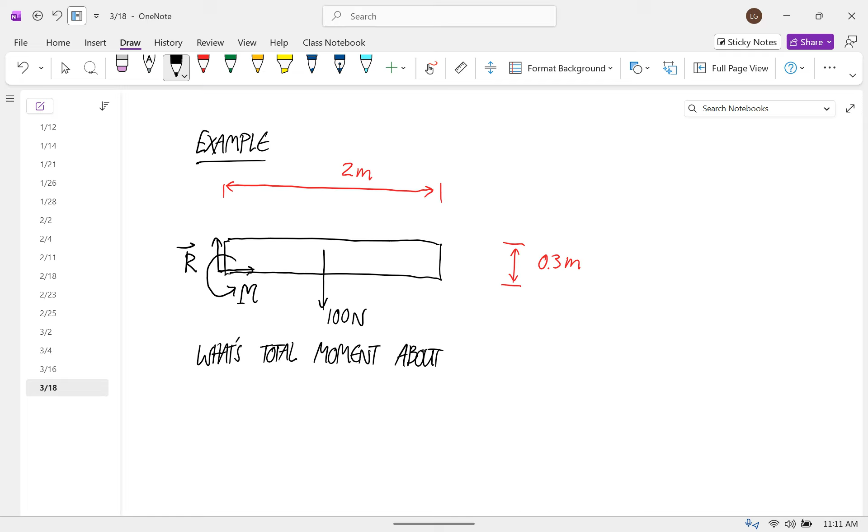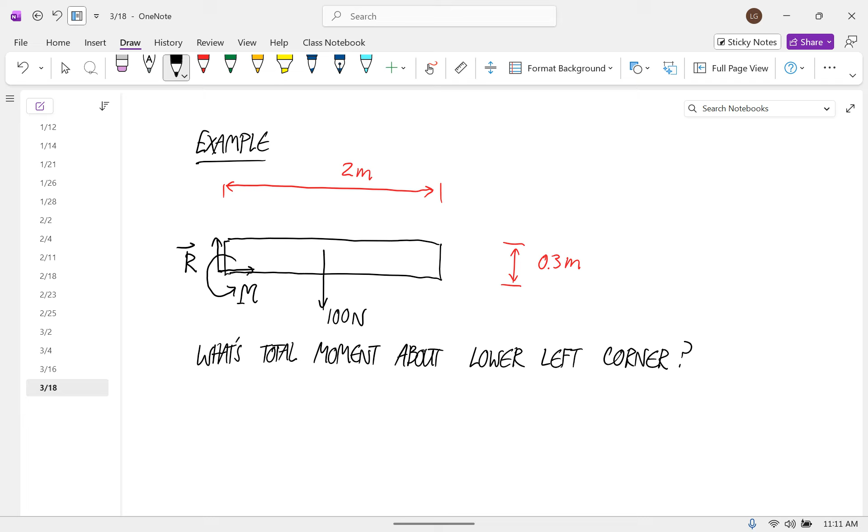What's the total moment about the lower left corner? Okay, so I'm going to write out this table: rho, force, moment. I'll start with that 100 Newton force.

The rho vector is this. It goes from the about point to where the force is applied. So the horizontal component is 1 meter, the vertical component is 0.15 meters. So we have 1, 0.15 for the rho vector. The force vector is 0, negative 100. The cross product is negative 100.

Then we have the force vector, r, that's acting at the about point. So what's the vector from the about point to where that force is applied? 0, 0. The force is Rx, Ry. So the cross product is 0.

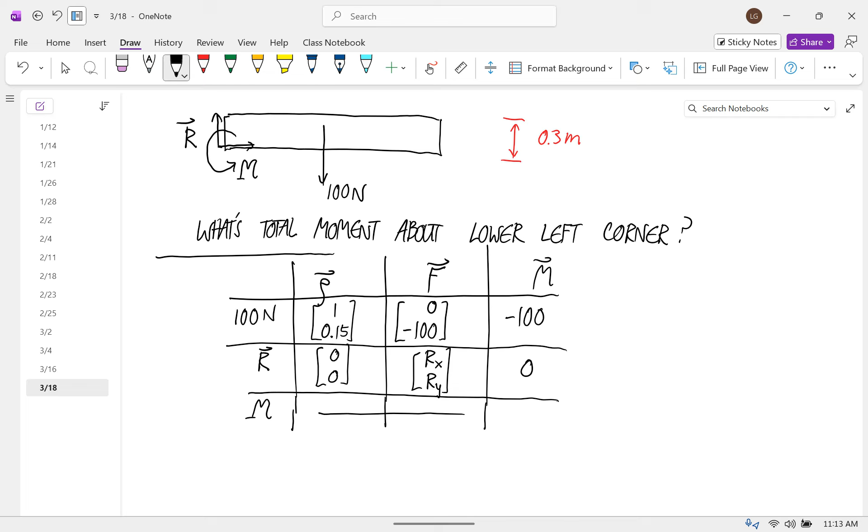And then the moment - we don't care about a rho vector, we don't care about the force, and this is just m. So the total moment about that lower left corner is negative 100 plus 0 plus m, negative 100 plus m, about the z-axis, or in the z direction, I mean.

Any questions about that? The other thing about this table is we've kept track of all the forces as we've gone too. So what about the total forces acting on this body? Well, those we can get from just adding up these force vectors. So the total force on the body is 0, negative 100, plus Rx, Ry. So that's Rx, Ry minus 100. And these will both be useful things for us.

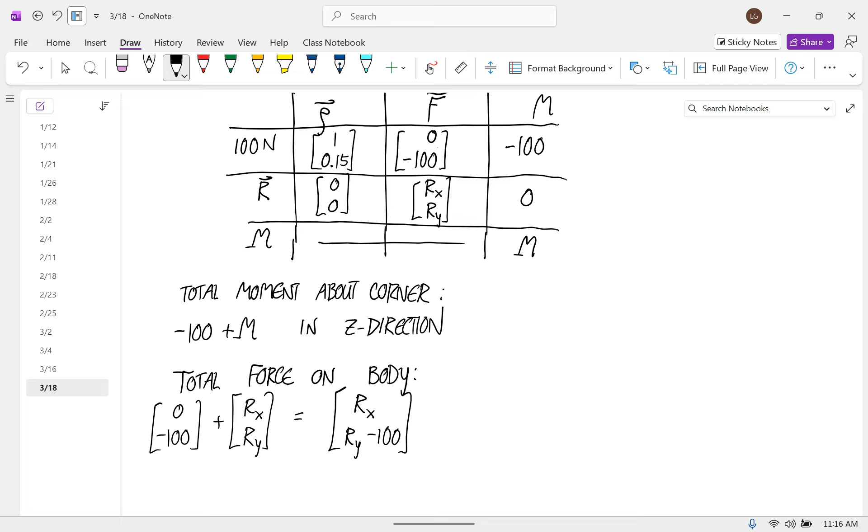Any other questions? Was the reason why we have to do m here in this last example because of the unknown force vector? No, it's actually, in this case, things can provide couples.

Imagine that this beam is really connected by a little bit of material to the wall - okay, so this is welded to the wall. And that weld will do two different things, or three if you want to think about it that way. It'll prevent it from translating horizontally - that's the unknown X force. It'll prevent it from translating up and down - that's the Y force. But it'll also, you know, a hinge joint could do that. A hinge joint would keep that part of the metal right there, but a hinge joint would let it fall down. This weld joint doesn't let it fall down.

And the way it does that is it applies a series of couples to this where, so this thing wants to fall down, this has to apply a force this way with a corresponding force this way. And that's the unknown couple. So that's the reason as to why we have m. That's why that would appear in a real problem, yeah.

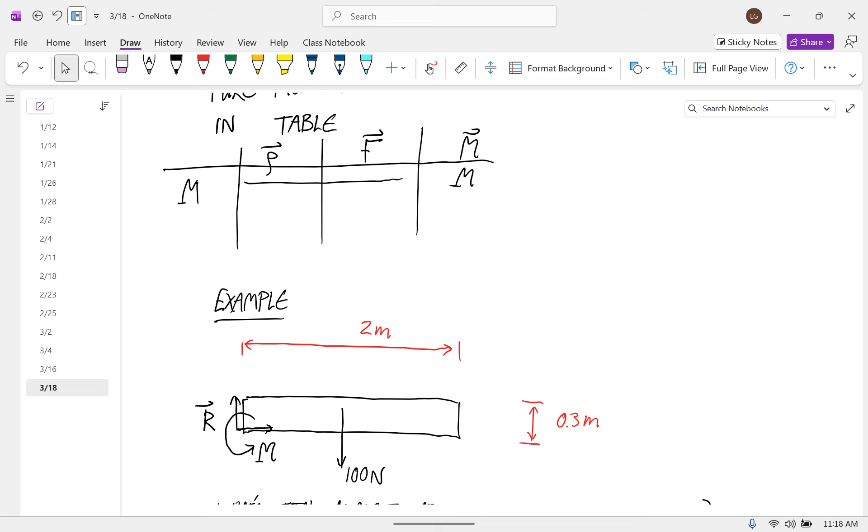Yeah, we'll go into all this. You don't have to, this doesn't all have to be crystal clear yet. But whenever you're confused about what a moment is or how to use this table, just remember to go back to these notes. Everything you need to know about moments is basically in today's lecture. Okay, that is all.